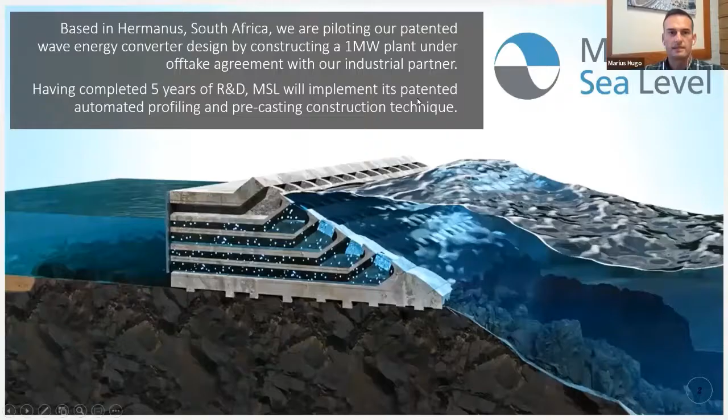So yes, we're based here in Hermanus, and we've had about 5 years of research and development in this wave energy technology. The key thing I just like to focus on here is the technology itself is relatively simple, and I'll talk about that now. The challenge and the research that we've been doing is more about how to commercialize the technology.

So as with any renewable energy project, or any project for that matter, every rand and cent that goes into the construction of the project needs to be repaid by the revenue generated from it. So in an energy project, if a project costs 30 million rand to build, you need to pay back that capital through the rand per kilowatt hour that you sell the power for.

So if a 1 megawatt project costs 100 million rand to build, I would have to charge 20 rand a kilowatt hour. And as we all know from our monthly municipal bills, no one is going to buy power at that cost. So that is really the state of ocean wave energy globally right now. And the challenge, the race is to achieve a cost competitive rand per kilowatt hour from ocean wave energy technology. So that's the key, and you'll see a bit more detail as we continue.

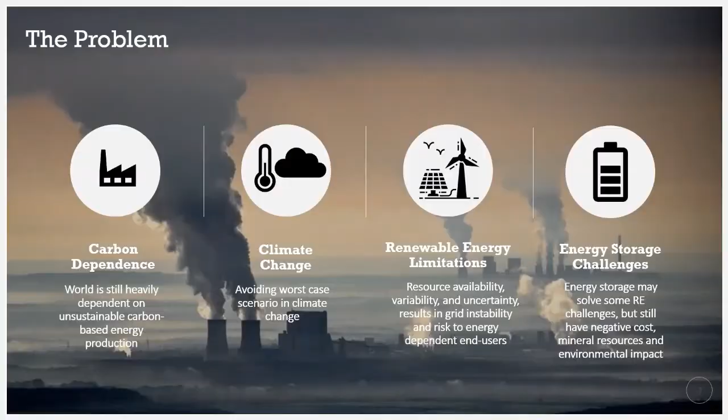Energy storage is of course one of the big solutions to those limitations, but it comes with a big cost, as well as some environmental impact in the manufacture of battery technologies, and there's a host of new innovations in that way. So that's really the problem as we've defined it, and the reason we believe wave energy might be part of the solution. So the first thing, and I referred to it in the previous slide, ocean wave energy, as you can see at the left there, has a much higher capacity factor compared to hydro, wind, and solar.

When I actually built this slide, I was quite surprised to see hydropower having such a low capacity or availability factor. But that has obviously got to do with seasonality, especially in South Africa. You can imagine the Orange River during the low rainfall months being a fraction of what it could be. So the capacity factor there is a result of seasonality. Wind at about 34% and solar at about 25%, I'd say, is very generous. But that is obviously highly dependent on where you are in the world.

The waves, they just keep coming. It is an incredibly consistent energy resource. We've mapped about 15 years' worth of ocean wave data from a macro point about 17 kilometers out in the ocean. It's 3-hourly data, and the fact is that we get very, very few days per year that we won't be able to generate power. So our capacity factor or availability factor here in Hermanus, I'd say, is much higher than the 60% on the slide, even though, yes, some days you'll have more power available when the waves are bigger, and less when they're smaller.

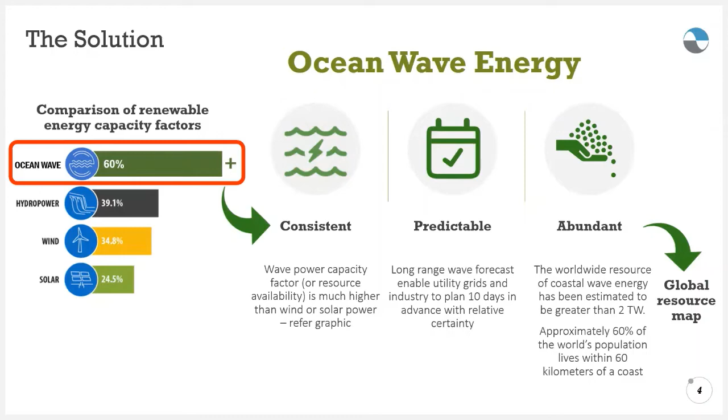The last aspect is it's abundant. So wave energy, as you can see from the following slide, which is the global wave energy resource map, says, okay, where is wave energy viable? Wave energy is measured as kilowatts per running meter of wave front. So if you're standing on the beach looking out at the waves, every 1 meter of the wave in front of you has a certain energy capacity, and that's what you're seeing on the map. The dark red being 60 kilowatts per meter and up, going all the way down to the blue being below 5.

So ocean wave energy is viable anywhere we're seeing red, orange, yellow, and dependent on the technology, even the green. So the application for wave energy in the open water or on the coastline is huge. Interestingly, 60% of the world's population lives along the coastline. That's just human nature, and thus a lot of the market that could benefit from wave energy doesn't require large transmission systems. In our case, Johannesburg might be one of the big exceptions.

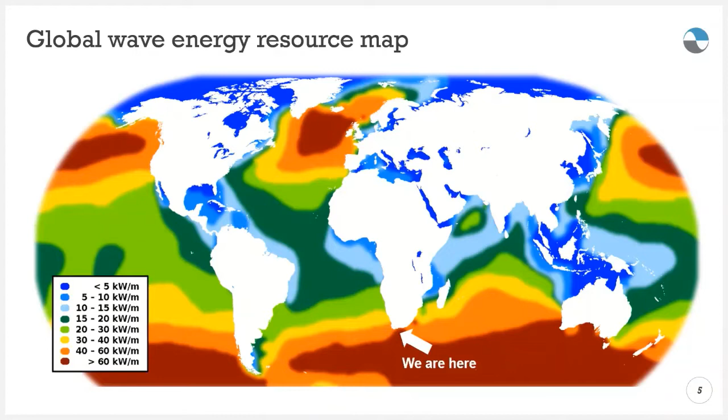But there we are, as you can see on the map, how fortunate we are. It's almost scary how blessed South Africa is with solar and wind, and as you can see now, wave energy as well. I see it almost as a responsibility that South Africa has to learn how to harness this. And once we are able to do so, I think the application thereof in the rest of the world is fantastic.

So let's focus a little bit on our specific wave energy converter technology. While I talk, I'm going to play a video in the background. If somebody on your side can just confirm for me that the video is playing correctly, I'd appreciate that. Is it visible on the screen? It's playing, yes, it's okay.

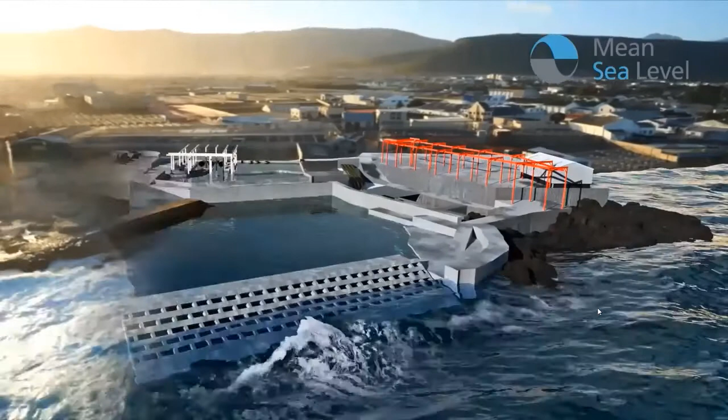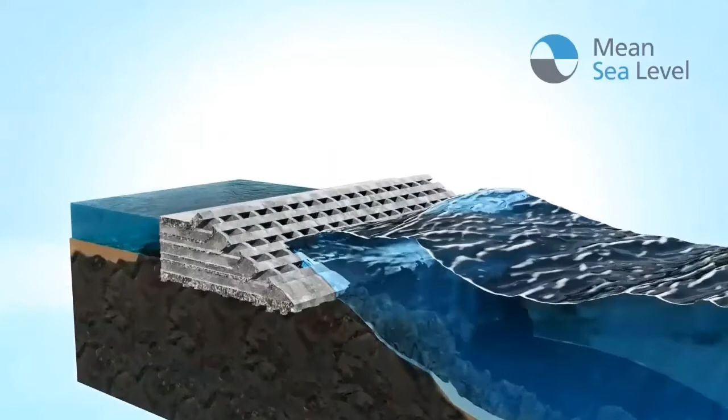Okay, so this is our site in Hermanus. We've had a digital overlay of what the plant might look like. As you can see, it's essentially a dam or a reservoir on the shoreline. We've made use of the natural geography of a little bay in front of the harbor. And as you can see now, we're going to have a section cut of the functional wall. So the waves run up a slope of the wall, then into a dam or reservoir through a set of valves at the back.

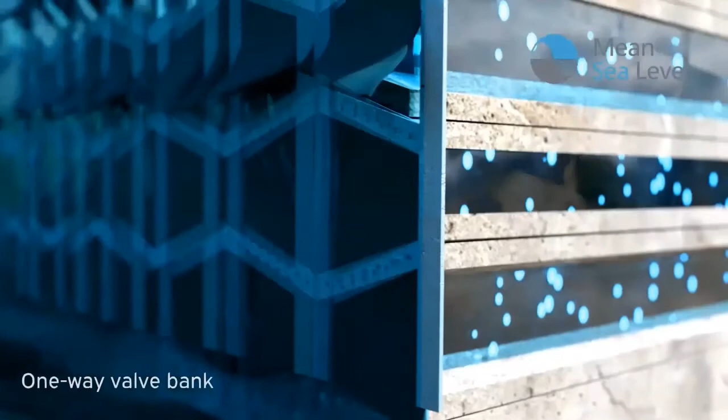The wave can either run up and over, called overtopping, or in our design, it can go through the wall itself and then have a set of one-way valves at the back of the wall, which prevents the water running out the same way that it came. So if the dam is full, the valves are shut and the waves need to go to the next level.

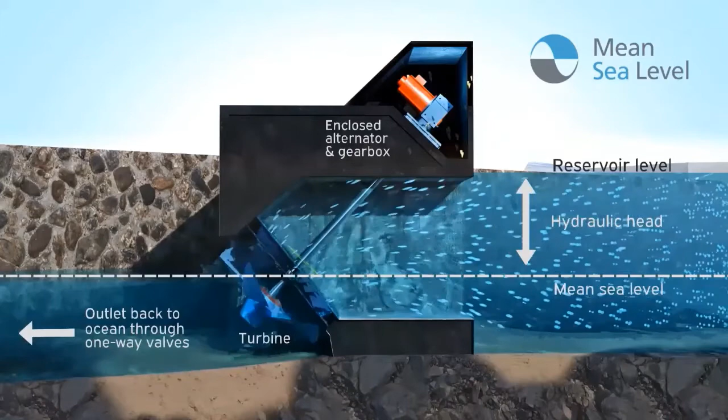The water then runs from the reservoir at the back of the dam through a very simple hydroelectric turbine. There's a couple of different design options here, but it's as simple as that: the kinetic energy from the wave is captured into potential energy in the reservoir, converted to hydroelectric energy through the hydroelectric turbine.

So one other aspect to the design is the little triangular dam that you see on the left-hand side of the screen. We call that a turbine stabilization dam, and that dam is there with one-way valves leading out to the ocean, so that the water can move back to the ocean. But when a wave approaches that wall, the valves close and prevent the water from going in.

So essentially, the reservoir has got the highest head possible, with the waves filling it up, and this little dam on this side has the lowest possible. And right in between sit the hydroelectric turbines, which creates the head difference you need to generate power.

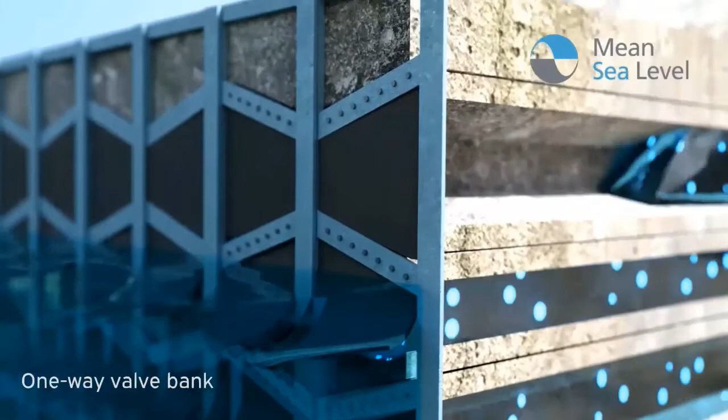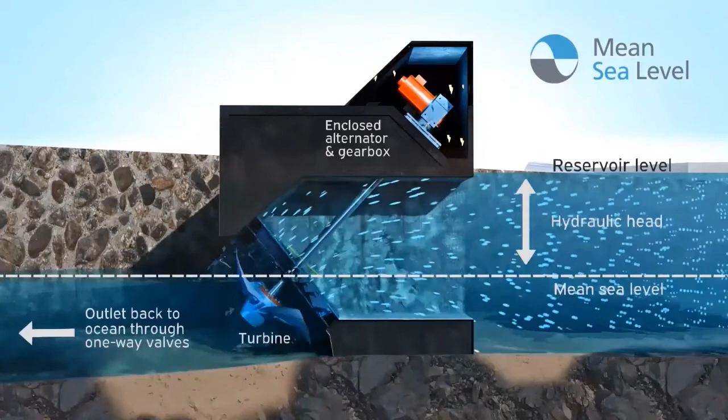The massive benefit that you have on the open water systems is that you don't have as much kinetic energy to deal with of waves actually breaking. So you also have a massive scaling factor in the open water systems, where you can really cover square kilometers full of devices in order to generate power.

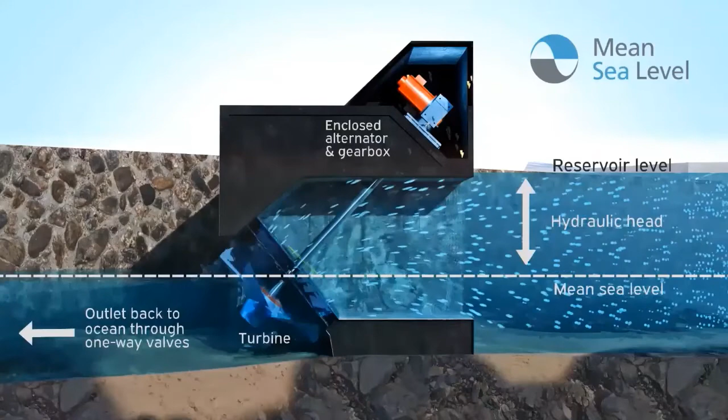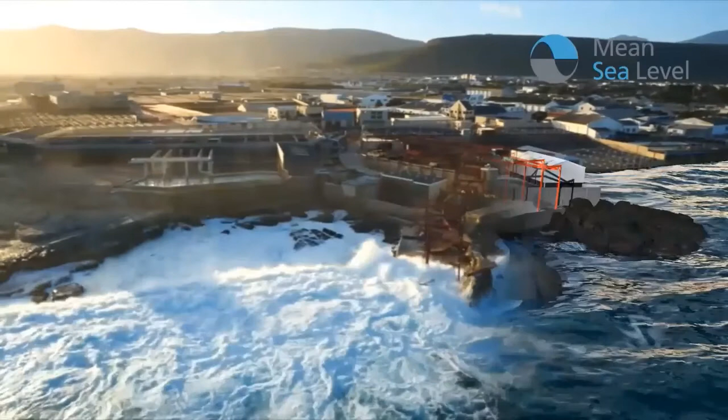However, the big drawback of an open water system is cost and environmental. So from a cost perspective, you're dealing with underwater cabling, you're dealing with mooring, so big concrete blocks that hold the device in place with very, very strong cables. You're dealing with needing dry dock facilities, divers, boats, and maintenance costs that escalate quite dramatically.

So if we add all that up without even considering the cost of the wave energy device, open water wave energy is a very, very costly exercise, and thus the current commercialization of wave energy is facing those challenges.

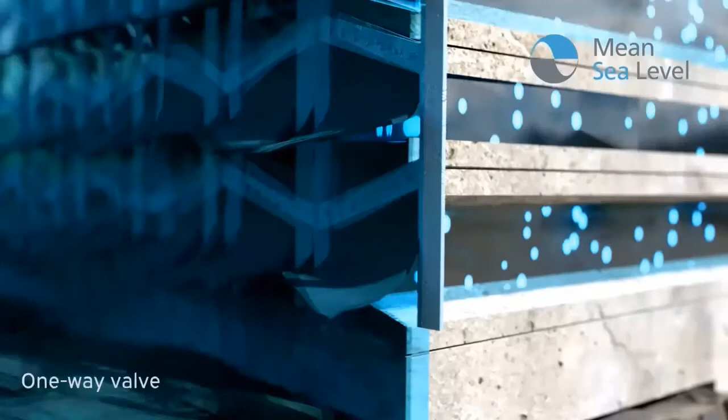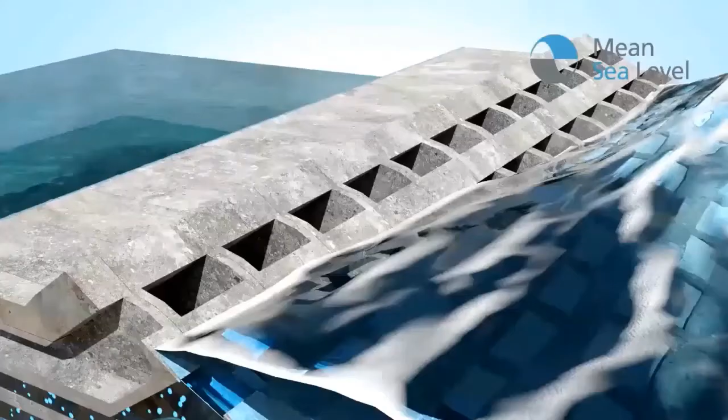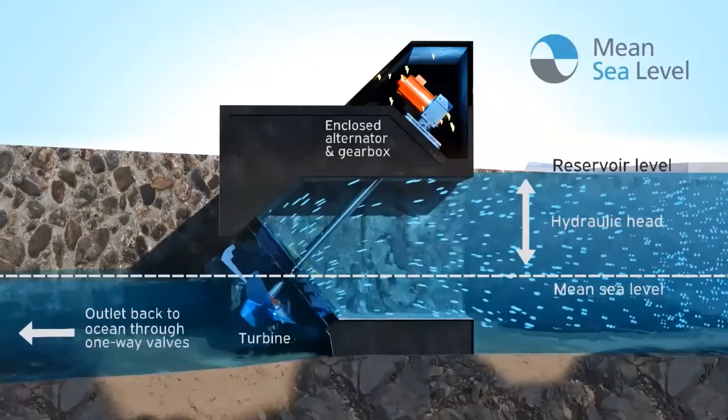So we decided to stick to what we know and to sidestep a lot of those issues by building onshore or nearshore. Now, we sidestep a lot of the cost issues, but that does create significant challenges in constructing in a very energetic surf zone. And that's where our challenge currently lies. Luckily, there's enough coastline, as you have seen, to make use of. And eventually, the system itself becomes an ecological system, which would have very low visual, noise and environmental impact.

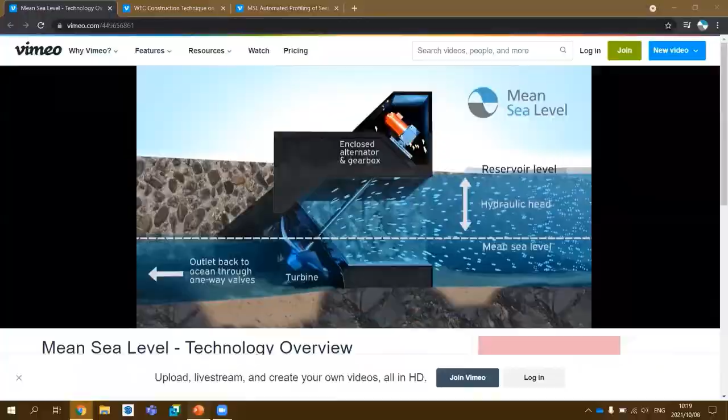To carry on with the slides. So our business model is currently at a point where, as I've said, we've completed about 6 years of research and development into the construction technique. If we have got some time at the end, I'll go into some of the history there. But as I said, it was a lot of trial and error as far as construction is concerned.

We've patented a lot of the new construction techniques that we've had to develop, and we've prototyped some of that actually in situ in the sea, actually building up quite a lot of know-how in how to do this, which is one of the big benefits we've gained, other than actually knowing what to do. The know-how in working in that surf zone is what I believe is one of the very valuable lessons that we've come out with.

So the next step for us is to actually complete this 1 megawatt pilot project at a commercially viable cost. Now, the question I often get, especially from people that are in the construction sector, is that people build harbor walls all the time. Why are we struggling to do so? Why are you struggling to build a wall in the ocean when people have been building walls in the sea since the Roman time, maybe even earlier? The simple answer really is cost.

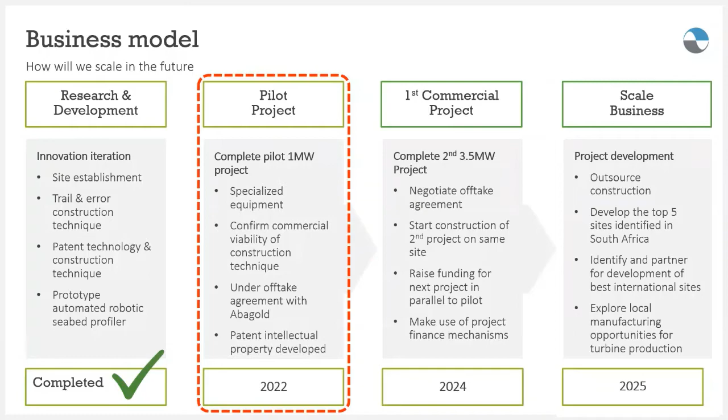So I'm going to just skip to one slide further so you can see an aerial view of our site. Our pilot WEC site is over here in the top left-hand corner. This next site here is the next project. So once we achieve the first one, we'll move on to this one. And this hydroelectric project was completed actually a while ago and has been commissioned.

The reason I want to show you this map for now is the challenge in using traditional techniques of construction, which essentially is end tipping. So what they do is they take rocks and they put them in the ocean, build up a rock bed, protect it with dolosse in front of the rocks, and then cast a concrete layer on top of those rocks. Now, if you're building a solid wall, that definitely remains an option, whereas our wall has got a lot more functionality to it.

But more importantly, the requirement for dolosse, which are essentially breakwaters to protect the wall, does the exact opposite of what we're trying to achieve. In other words, we're trying to harness that kinetic energy, and not disperse it before it gets to the wall. And then the only other option would be to put dolosse out in the ocean, build behind it, and then remove them. But then you're getting back to your cost challenge. So we did cost those, and definitely not a viable option from a commercial perspective.

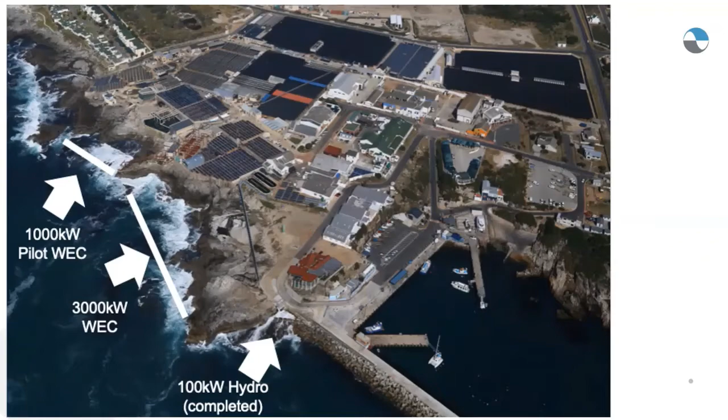So we have sat with every civil marine engineer that would give us the time of day, and we've brainstormed this over and over in a variation of approaches, and what we believe we've come up with is the only commercially viable executable construction technique that we are ready now to actually try in the ocean. I'm going to get to that point.

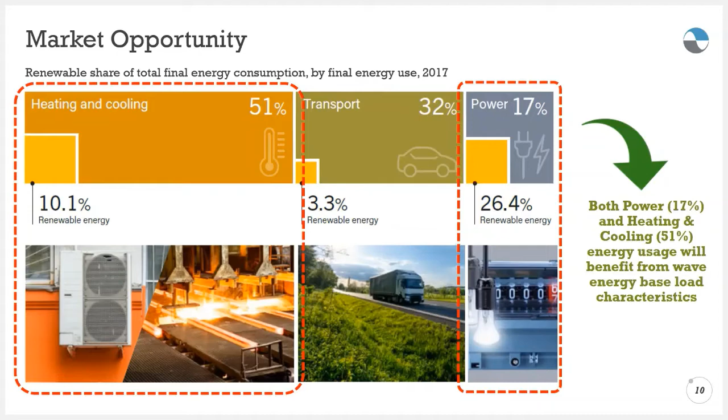Wave being probably the most prolific, but tidal is also very interesting, especially if you've got a very high tidal variance. In South Africa, our tidal variance is only about 1.6 meters between high tide and low tide, which doesn't give you much to work with from a head perspective to generate hydroelectricity. In areas where that's viable, you have tidal variances of 8 to 16 meters. And that's where some of these mega projects in Europe are looking at tidal as a very viable option.

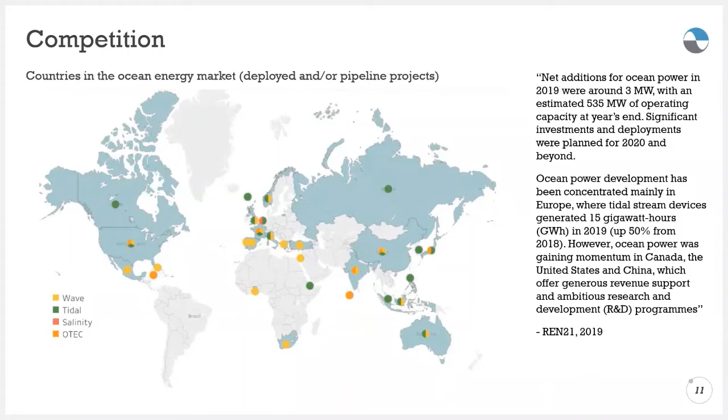Now, we spent many years, and I'll get there if we've got time at the end, looking at casting our foundation underwater in situ within a box or a caisson, waiting for that to cure, and then placing your blocks on top of that. But because of the energetic surf zone, that technique proved to be incredibly difficult to get right repetitively. We did manage to get it right to a degree, but I realized that for all the stars to align, and working in front of an abalone farm where water quality was paramount, the risk in that construction technique was too high.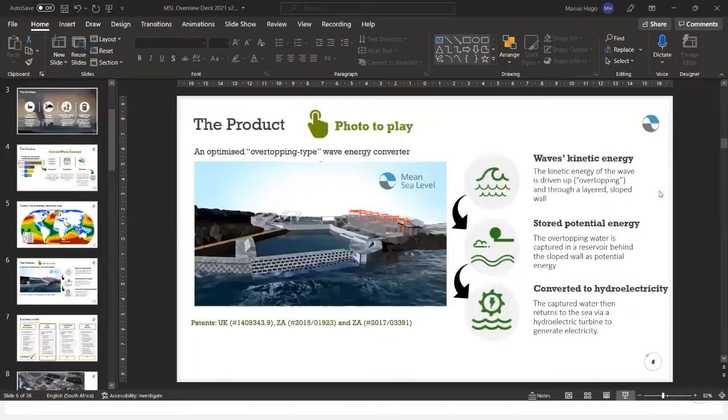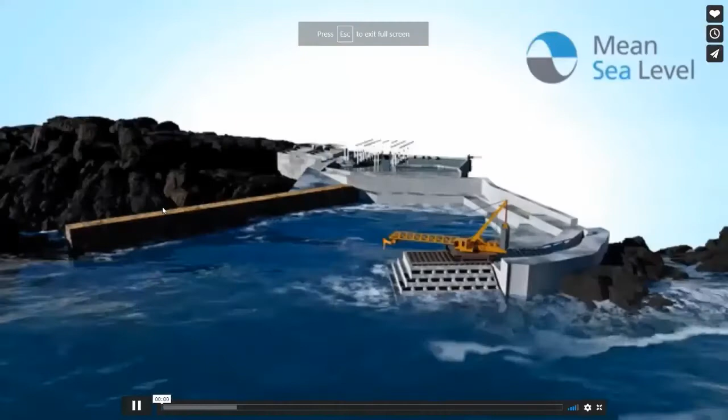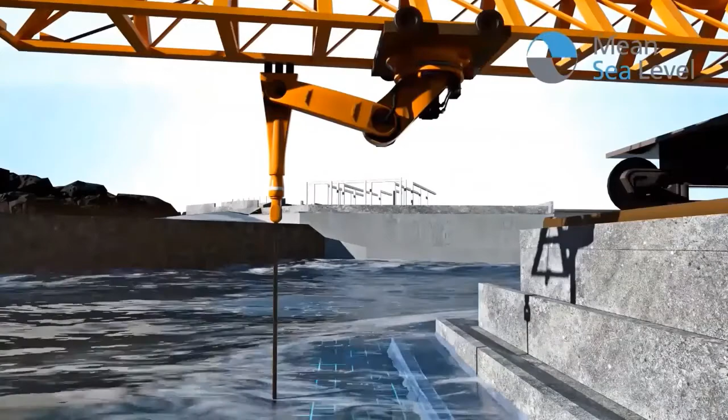And then I'll show you how far we are in the realization thereof. So you'll recognize the dam building in the background. And now this is a crane that we have with a robotic arm that probes the seabed. So essentially it's taking depth shots in a grid pattern of the uneven rock bed.

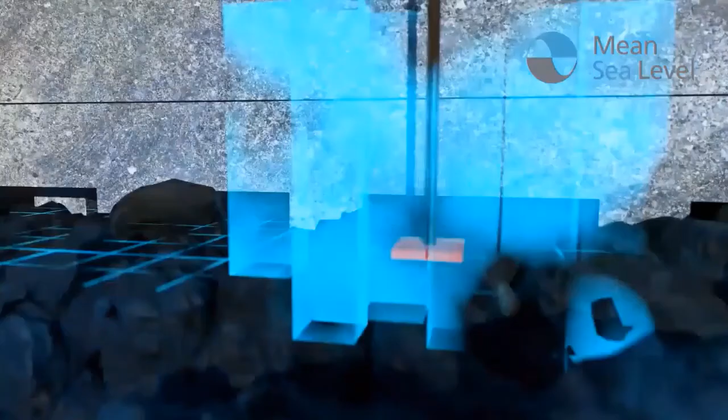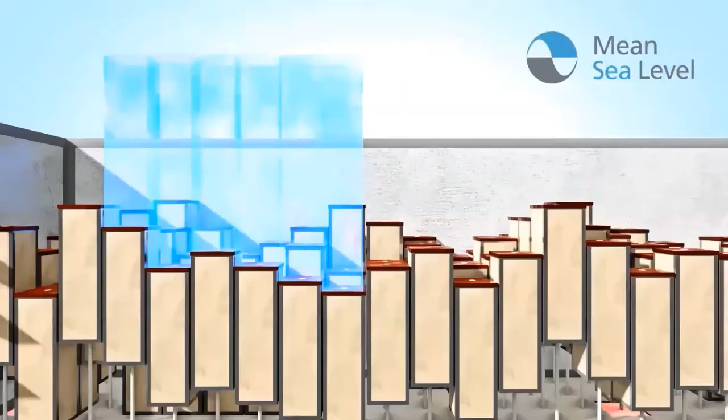So instead of casting in situ, we're now taking a map of the seabed itself, recorded automatically by the robotic arm. That information is then directly used in a concrete mold, which the floor of the mold adjusts to that information that we've just got from the ocean. The concrete can then be poured into the mold, as you see on the screen.

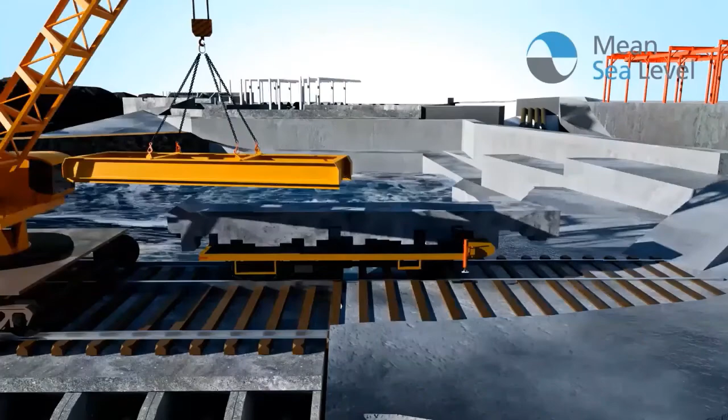And now you've got a foundation block of about 40 to 50 tons that gets railed out back to the crane, picked up, and placed perfectly on the seabed, almost like a jigsaw puzzle. Then the crane brings precast blocks and packs it in that fashion. I wish it happened this fast, but that was really just to illustrate that technique. I'm going to replay it just to illustrate it once again.

So you have a crane which essentially has an automated probe that follows a very strict grid pattern, probing the rock bed. The size of that probe foot is quite important. If it's too big, you don't have enough touch points. If it's too small, it will take too long. So we believe anywhere up to a 500 millimeters by 500 millimeters foot plate will give more than enough stability

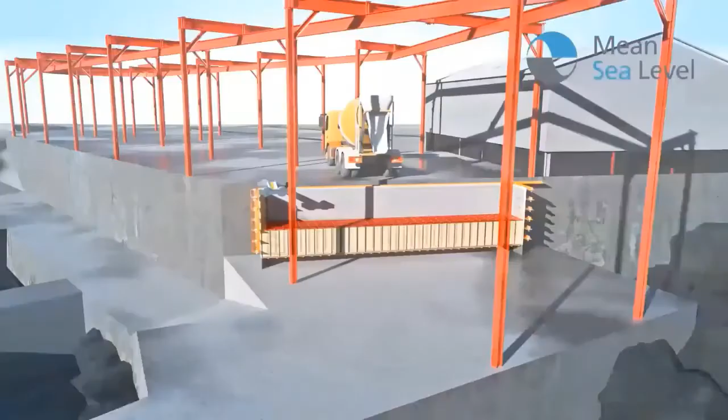for that foundation base. That information is translated to your mold, which we will automate, so we won't have to manually make all these adjustments. You'll see there's actuators at the bottom of the mold which push the columns up, and then lifting it and putting it on a rail down to the same crane on the site is relatively simple, as long as you have a big enough, strong enough crane, which is also relatively available.

I initially thought twice about the idea of making 40-ton blocks, thinking it's absolutely massive. But most of the guys that work in the rigging industry will readily tell you that that's not a problem, and that they work with 100 tons or higher quite easily. So that is the concept that we came up with.

We actually executed a similar technique that wasn't automated, where our probe was literally a staff going up and down, almost like a surveying staff that took the measurements. But we found that manual process, A, took too long, and B, wasn't accurate enough. So then we came up with the robotic technique.

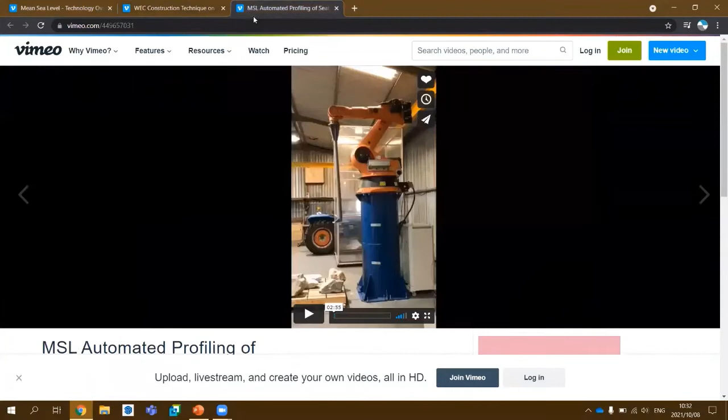So I'm going to show you one more video, the last video of how this arm works.

I just want to put the sound down, otherwise it's quite loud. But essentially this is, or maybe, I'm not sure if you can hear the sound in the background. Can I maybe put it up? Can somebody confirm? No, you didn't click the sound, so it doesn't come through. Okay, now then I'll talk us through it.

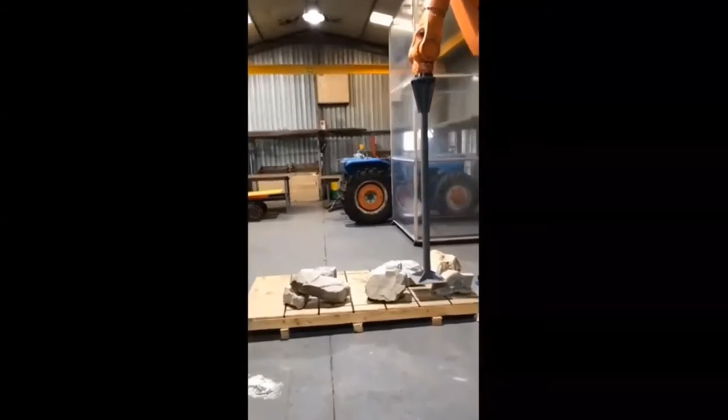So as you can see, the robot is pre-programmed to probe in a grid fashion, which are those black lines on the floor. We dropped rocks in place to make sure we have a random pattern to profile. And then as the probe goes down, it senses when it has resistance, and then stops, records the depth, and then lifts up and moves into its next position. This is a very slow process. I'll actually later in the video speed it up quite significantly. You'll see now.

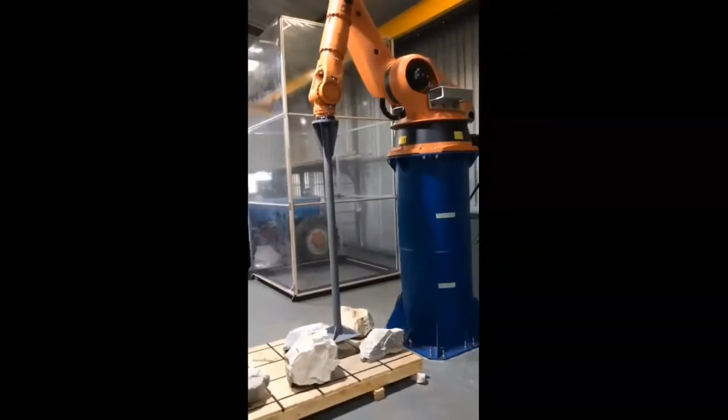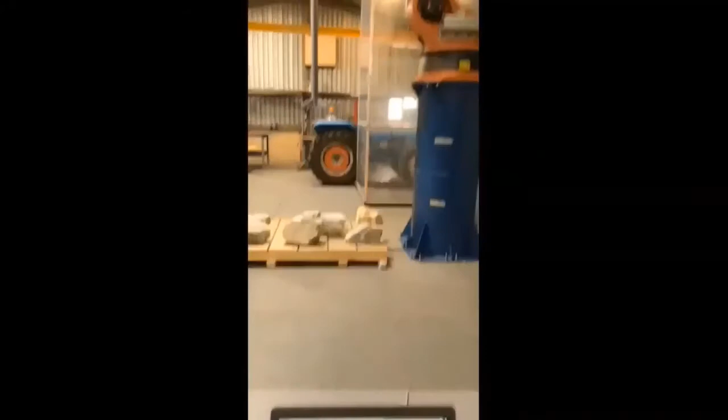So it starts moving at about an 80% speed, and that motion can actually get you the entire 4x16 meter grid pattern within half an hour to an hour. The data is automatically recorded in a sub-millimeter accuracy, which is phenomenal, and that data will be used directly to build a foundation that we refer to.

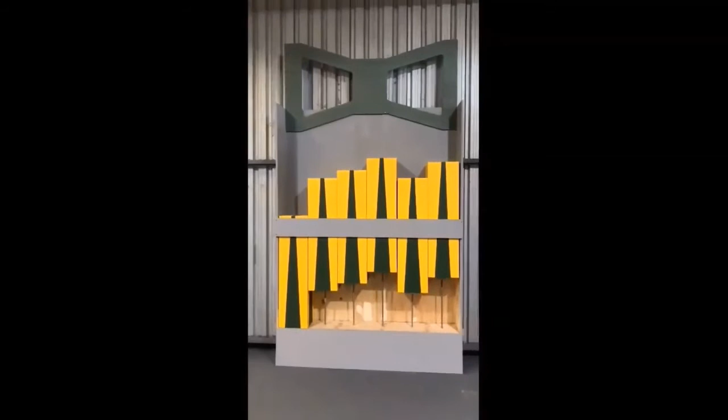Pierre helped us build a mock-up of that automated concrete mold, and those yellow and green columns move up and down automatically based on the depth profiling information. And then that bow tie looking structure on the top is one of the precast units that fits on top of it. So this gray area, I'm not sure if you can see, between the yellow columns and the green bow tie becomes the solid concrete block that fits perfectly on the rock profile below the water. So I had a lot of fun doing that.

One question I often face is why automate? Now, having worked in the ocean and tried to with the human element for the last 5 years, it's a very dangerous environment for people to be working in the wave zone. We need to be incredibly accurate, and it's an incredibly repetitive process as far as getting these depth shots. So if anyone knows anything about robotics, the actual definition of robotic applications is exactly that. The robots are good for tasks that are repetitive, dangerous, and accurate. So the penny dropped, and we slowly started looking into it, which led us to this concept of an automated profiling technique.

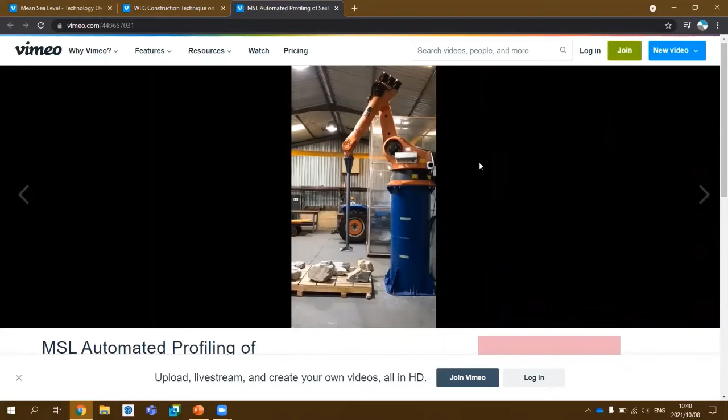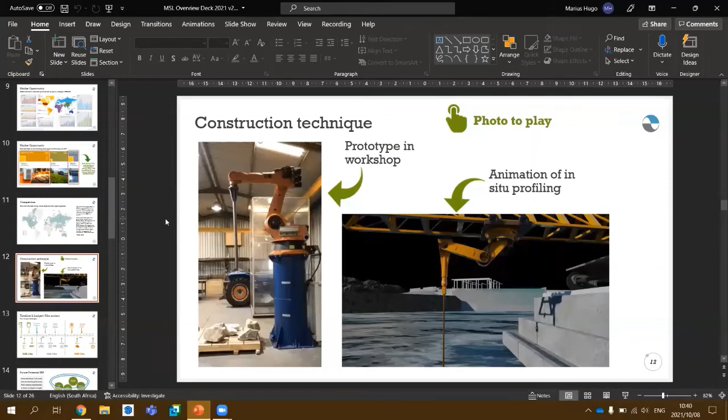So it sounds like a lot of things need to stack up to do that. We'll start this process by doing the profiling, making sure that's right, potentially having the concrete block cast by someone else off-site, installing it 2 weeks later if we need to in order to trial the technique. But that 8-hour process from profiling to packing is really the key to making this project commercially viable.

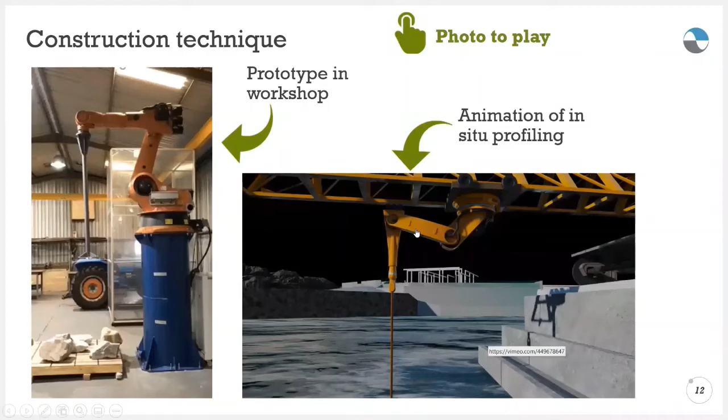Can I quickly ask you, do you use reinforced concrete, and how do you place your rebar if it's reinforced? Yes. So yes, we will reinforce it. The rebar is assembled within the top layer of the foundation block. So it's essentially almost like a concrete slab of a house. So you have preformed rebar shapes that sit in the top of your foundation block.

It's also possible, once you've had the floor of your mold adjusted and there are very deep areas which need additional reinforcement, to place rebar shapes within those blocks before the concrete is cast. So you've got your reinforcement cage, as they refer to it, in the top of the mold. And then if you need any additions, we'll add that before it goes straight in. So it's a very modular kind of concept.

We've also actually done quite a lot of that previously. We've cast these foundation blocks before with relative success. It took us a lot longer than the potential of an automated profiling technique. And we all packed these molds by hand with little shims. It took us a very long time. So the idea of automating that whole process that we've already gone through is the key to what we need to do.

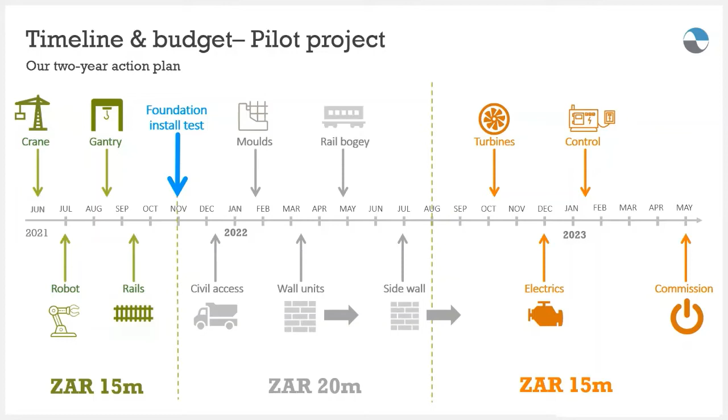So what we're trying to do is bring down the cost of a 1 megawatt project to about 35 million rand for a 1 megawatt project, which brings your rand per kilowatt hour to 1 rand or lower. So that's our goal. Our goal is to produce ocean wave energy at below 1 rand per kilowatt hour. And if we can do that, we have got a viable, scalable technology and construction technique, which we believe we can roll out anywhere in the world.

As a company, we often get asked, are we going to be a project company who goes from site to site building these ocean wave energy converters? The answer is maybe much more mixed. We've patented the technology, we could lease the technology to others, we could look at the engineering services that come along with the project. We don't necessarily have to own the project ourselves. We could do project development for third parties.

There's also a nice opportunity, I believe, for establishment of equipment fabrication, especially around the hydroelectric equipment, turbines and such, within an area just outside of Cape Town, where when you have your wave energy projects up and down the coast, you have a central manufacturing hub for the industry, as well as potentially even maintenance contracts to maintain these plants up and down the coast. So the business has a lot of potential in itself and for its investors.

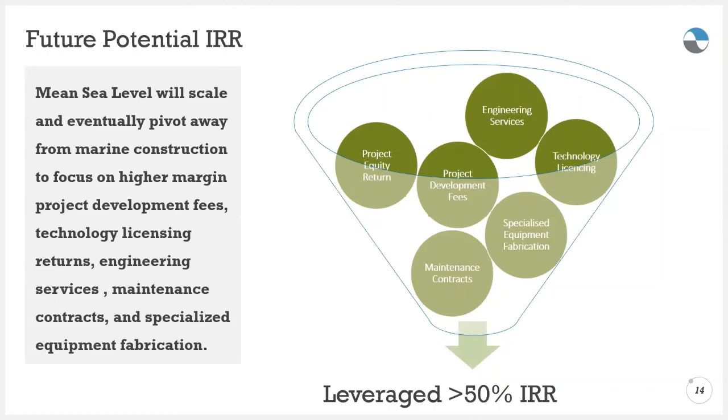This presentation I'm actually showing you is what I've been using to approach investors over the last year or so. Unfortunately, COVID has slowed my progress significantly, till the world comes to its senses again. But I believe the fundamentals are still in place, and we're kind of almost at the precipice of achieving what we've been planning to achieve for the last 5 years.

So we have a great team still involved. This is our board, and we have a fantastic situation with Abagold as the off-taker of our energy. Once we have our pilot project up and going, we've got the potential of selling electricity for the next project to the municipality or the other abalone farms. So we've got a fantastic environment in which to prove that this technology works very well.

Our current funders to date have been the Industrial Development Corporation, management. We've had fantastic support from mostly local angel investors or private individuals that have backed the concept, the team to realize this vision that I believe has got so much potential.

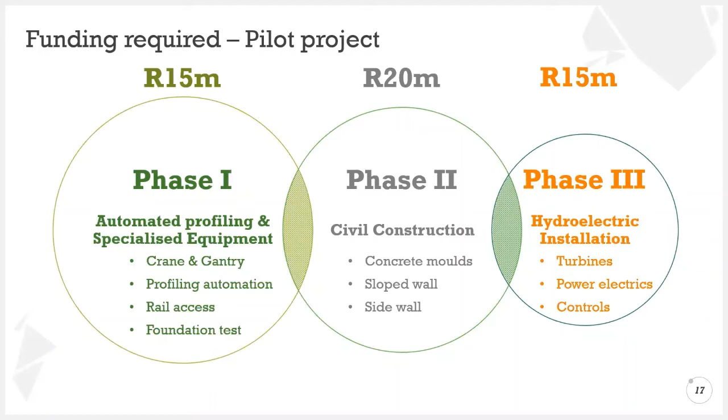The industrial partner here is actually Abagold. The project was initially envisioned as part of Abagold when Pierre was still involved, and then we established Mean Sea Level as a separate entity to pursue wave energy independently. So Abagold, as the industrial partner and off-taker, is obviously still rooting for us to solve their energy problem. As I've discussed, we've got a 3-phased kind of project rollout that needs to commence as soon as possible. And that's really the end of it.

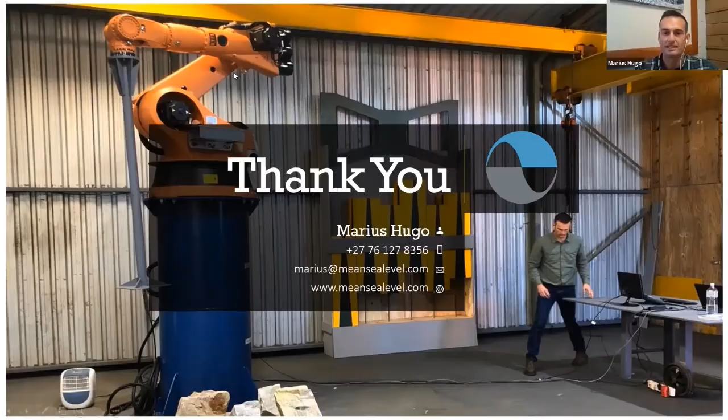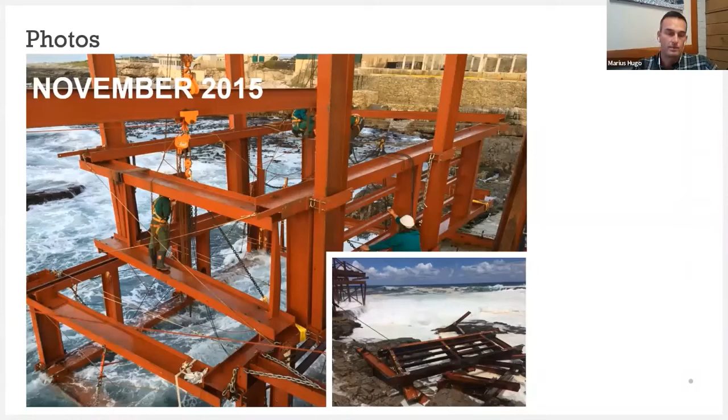I see we've got about 10 minutes left. While I take some questions, I've got a few slides of pictures from the history of our attempts at construction techniques in the ocean. You'll see there as far back as November 2015, where we were casting concrete underwater in these big cages. Those are sheet piles that we put around the concrete, around the section that we were going to cast in.

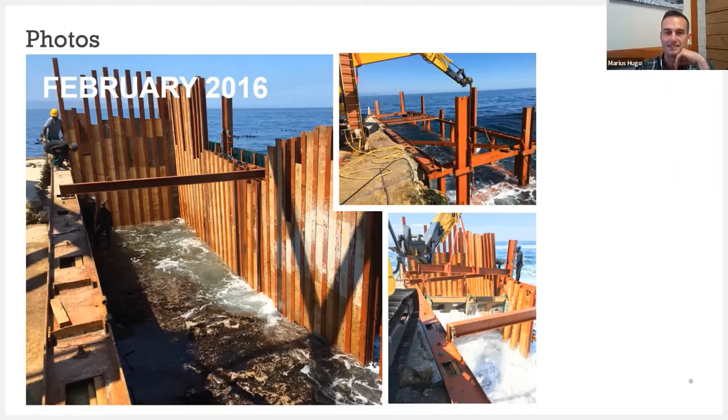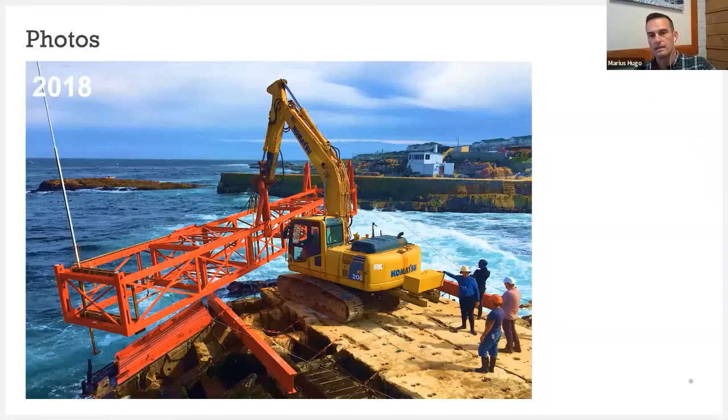But eventually, this technique that we developed, its Achilles heel was the size of the blocks. They were about 8 to 10 ton blocks that we had to hold together with hydraulic post-tension. But maintaining that tension in the ocean, where you've got essentially an earthquake every 12 seconds, like a wave, just turned out not to be a sustainable solution.

So one of the big improvements to this technique, where we felt we were almost there, was to replace this 20-ton excavator, which we used to put the blocks in, and scale up our blocks to 40 to 50 tons. We are very confident once you put a 40-ton solid block in the sea that interlinks with the others, you will have a solid construction with which to move forward.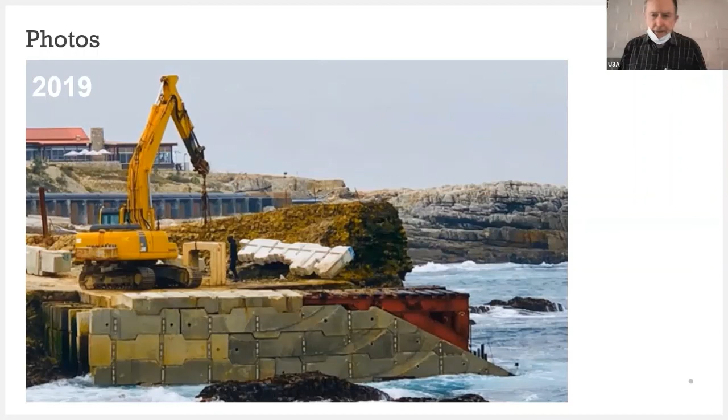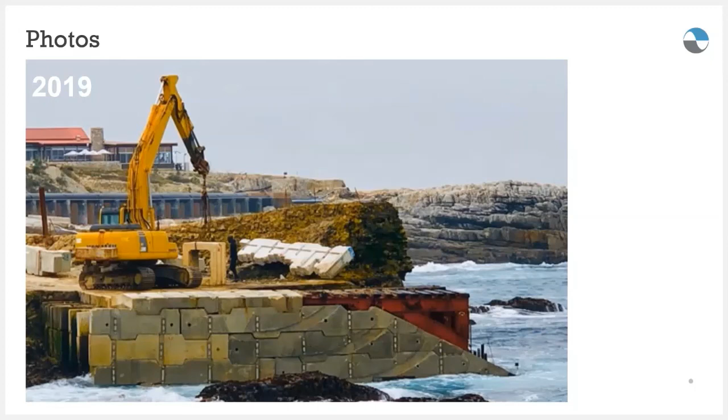Thank you, Marius. Marius, I have one quick question. In addition to the sand, what about sea life, fish and so on, also being washed in, and whether that'll have an environmental impact? Yeah, look, even the turbines that we're planning on using, which are 3-4 meter diameter turbines, are classified as fish and seal friendly. In other words, they're very slow moving, large diameter turbines, which won't damage the sea life. And then the dam that you're building essentially becomes almost like a tidal pool. So you'll have sea life in there, but it'll become its own environment.

I think the biggest environmental impact that this design has obviously is the footprint of your wall. So you now got the rock surface, which has marine life on it. And part of our environmental impact assessment states that we need to inspect that rock and physically remove any marine life that is worth preserving. So we have an independent consultant that comes in and does that work for us, and makes sure that we're not damaging any endangered sea life.